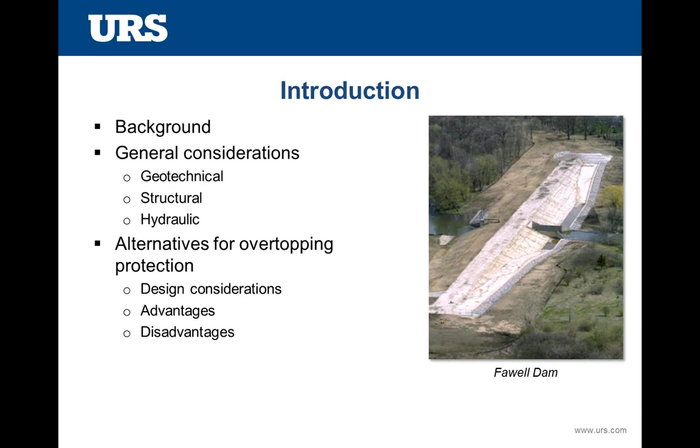I'll also give an overview of how selection of an alternative needs to consider not just discharge and velocity requirements for your spillway or overtopping protection, but also foundation conditions, structural considerations, and geotechnical factors. Then I'll end my portion of the presentation with a discussion of three situations or common alternatives I've used, and how we've incorporated design details to help mitigate the potential failure modes we'll be presenting here.

Just as an initial background, most of the interest in overtopping protection is a result of spillways on existing dams having an inadequate capacity. This inadequacy is driven generally by two things: the hydrologic conditions have changed in the methodologies used, or the hazard classification has changed due to downstream development.

There are many alternatives that can be used to increase or change spillway capacity, from raising the dam, changing the abutment or spillway configuration, or overtopping protection.

One consideration when selecting overtopping protection is that it introduces a potential failure mode that can lead to the dam breaching by directing water over the embankment. If the overtopping protection fails, you expose the underlying embankment material to flows or erosive velocities that can potentially lead to breaching of the embankment.

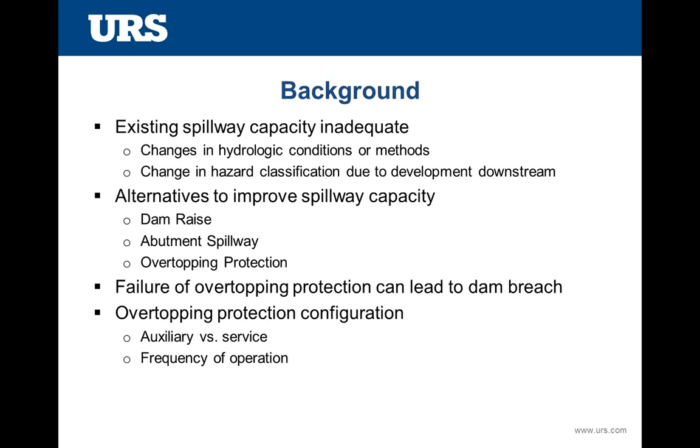The overtopping protection is also typically used for auxiliary purposes as opposed to a service spillway, and because of the potential initiation of an overtopping failure if the protection fails, the frequency of operation is also a consideration here.

Just wanted to provide a quick example of an overtopping protection failure. This was a small low-head dam, about 20 feet in height, that was protected by a conventional concrete overlay. There was no reinforcement or water stop in the joints.

Approximately one year before this photo was taken, there was an inspection of the dam where a one-inch crack longitudinally was observed near the crest of the dam.

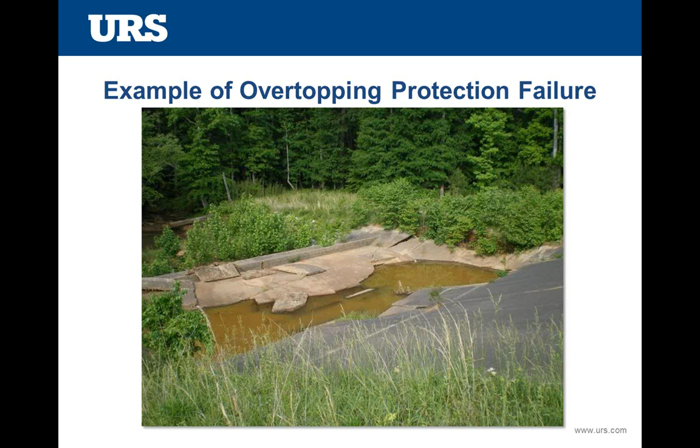The subsequent spring, there was a rainfall event that allowed the spillway to operate, with about 3 or 4 inches of flow going through. As you can see in this photo, the lower slabs of the chute as they enter the stilling basin have been displaced as a result of hydraulic jacking or uplift from water getting in behind the protection, going down to the toe, and then lifting out the slabs.

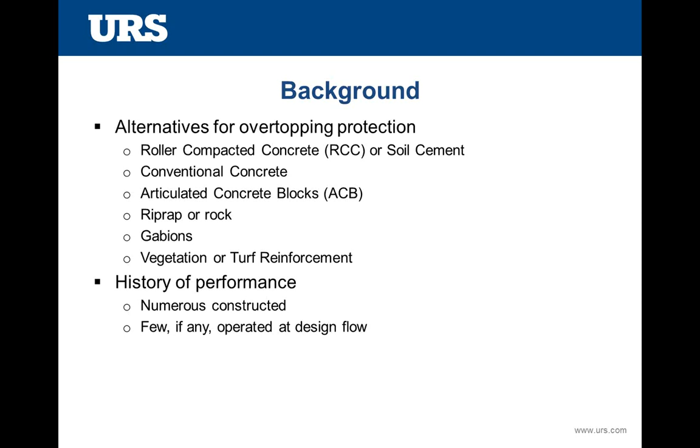Something else to be noted is the history of performance. While numerous dams have had overtopping protection constructed on them, few, if any, have actually operated clear up to the design flows, so the overall long-term performance is still something in consideration.

From general design considerations, the two potential failure modes of biggest concern are hydraulic jacking or uplift due to seepage or pore pressures developing underneath the overtopping protection, and water that passes through the protection and saturates the foundation materials, potentially causing piping around or adjacent to the structure, leading to structural failure of the overtopping protection.

Generally, from the frequency of operation standpoint, it's preferred if they operate less frequently than the 500-year flood. The PCA, Portland Cement Association, has recommended in the RCC Concrete Overtopping Protection Manual that they not drop below 100-year frequencies for these structures.

Something to consider too is once you start directing water over the embankment, there's a potential to increase or change the phreatic surface, and this can either impact embankment stability or again lead back to the potential for uplift or hydraulic jacking of the structural material.

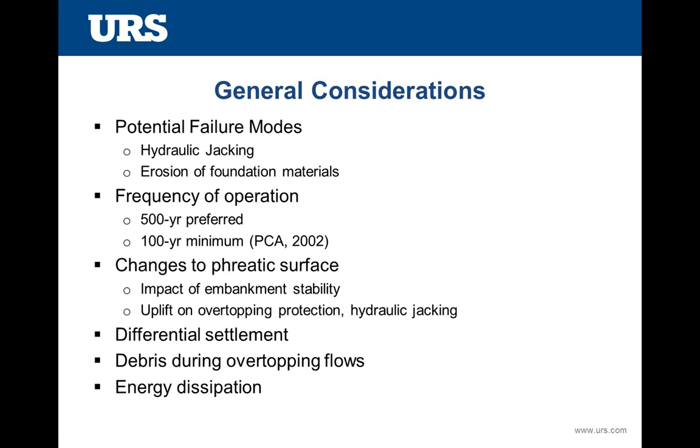And lastly is just general energy dissipation at the toe of the dam or at the end of the overtopping protection structure, making sure it's adequate so you don't lead into head cutting and undermining of the structure.

So some other general considerations about overtopping protection. By covering up the downstream face of the dam, it really limits observation of the embankment performance, so monitoring and long-term performance issues are more difficult to discern. The other thing is, as the dam or embankment is overtopped, there is a need for the water to converge back to the toe, and so we need to protect the abutment contacts with the embankment.

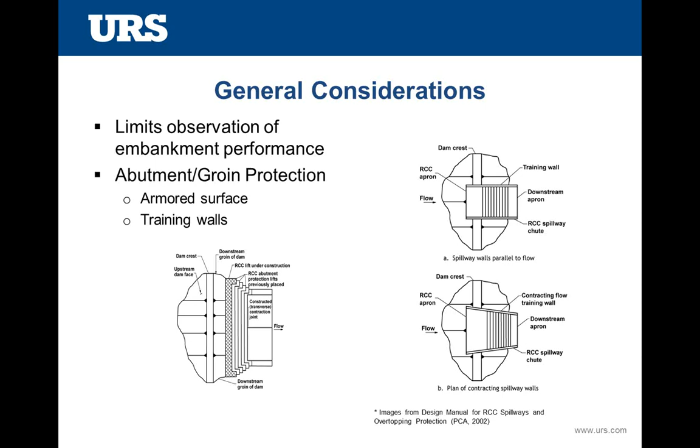Generally there's two options. You can extend the protection, as shown in the lower left picture, down along the embankment contact, and this would work for both articulated concrete blocks - this just happens to be an example of an RCC protection. Alternatively, on the right-hand side is more of a conventional training wall approach, whether they are parallel straight walls or a converging chute concept. Those are other options for keeping the flow off of the groin and protecting the embankment.

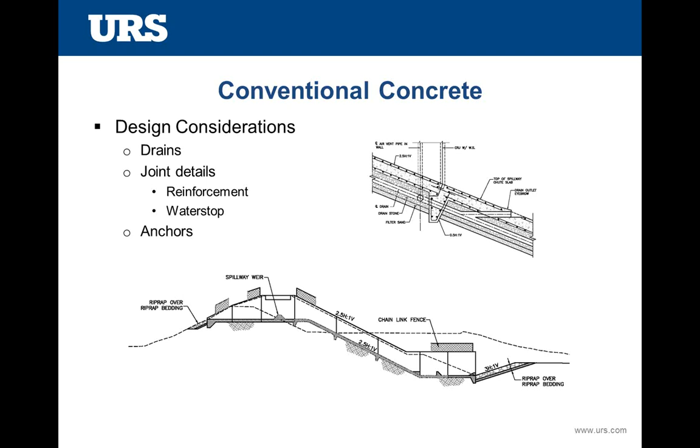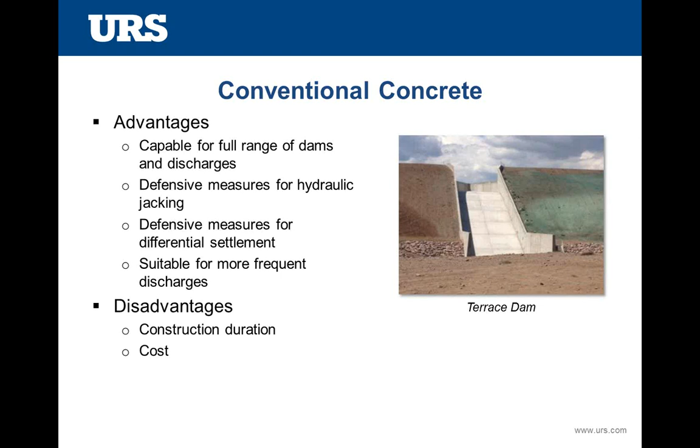So some of the advantages of conventional concrete are that it's really capable for a full range of discharges, heights of dams, and velocities. You can incorporate defensive measures to protect against failure modes. It can also handle some differential settlement, and it's also suitable for more frequent discharges because of those additional protections. However, some of the major disadvantages are construction duration - just the time to form and pour, the wait times between adjacent sections, and the overall cost. Depending on the actual configuration as it passes through the embankment, you can actually expose the dam to more risk during construction if the section of the embankment needs to be lowered for construction activities.

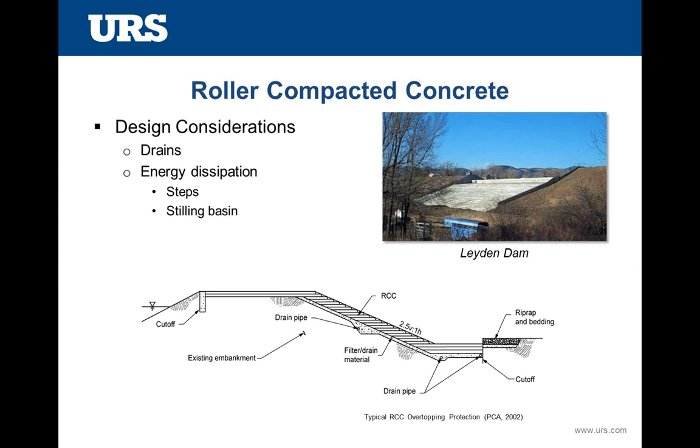As far as the advantages, RCC is suitable for higher discharges, maybe not quite as high as conventional concrete, but relatively high. Construction duration-wise, it can be put together pretty quickly, and we can also incorporate energy dissipation either through steps in the chute or into the stilling basin itself for an integral single product. The disadvantages are you really lack the defensive measures to mitigate differential settlement, water stop type material, and sometimes the availability of materials or equipment can be disadvantaged at certain sites and locations in the country.

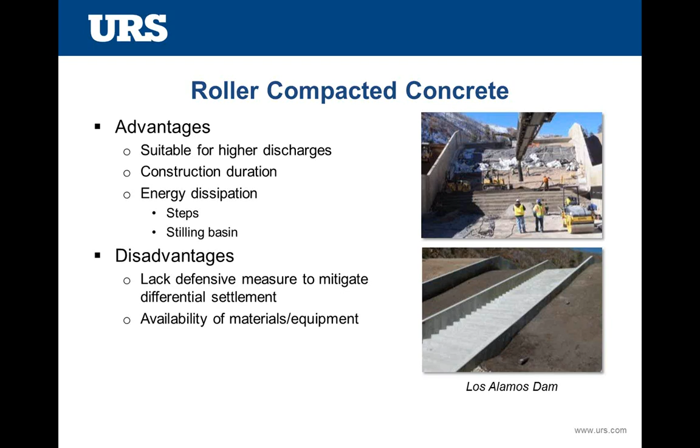From the articulated concrete blocks, we're starting to see some of the similar themes entering here. We want to have a drainage layer to minimize the potential for uplift pressures to develop. There are velocity limitations for the blocks in comparison to a conventional concrete chute. The other area of concern is flow convergence - if you want to wrap it around the abutments and down those groins, those concentrations of flow and complex hydraulic conditions need to be considered in the design of the blocks.

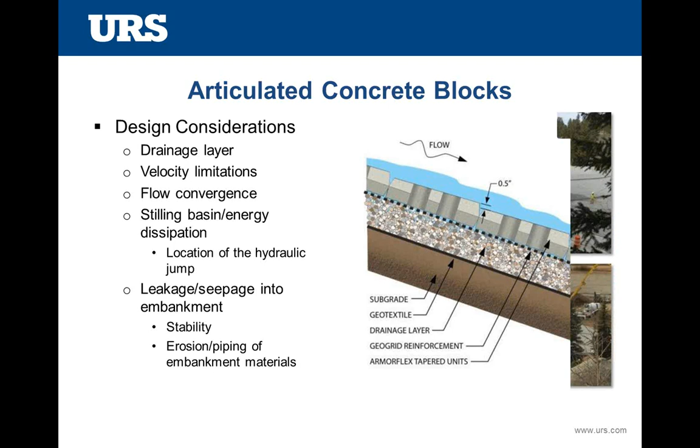And then last but not least is the seepage of water through the blocks and the gravel layer into the foundation or embankment material, which needs to be considered both in the stability of the embankment as well as the potential for piping of the material.

From the articulated concrete block, some of the advantages are that it's a flexible system with the potential to move. Construction duration can be assembled very quickly, so if you have to lower an embankment to do construction, there's a smaller window for being at risk. And it's a customizable geometry to fit site-specific conditions.

Some of the disadvantages compared to the other two systems we've talked about: lower design discharges or velocities, and the potential for extended use can elevate embankment pore pressures.

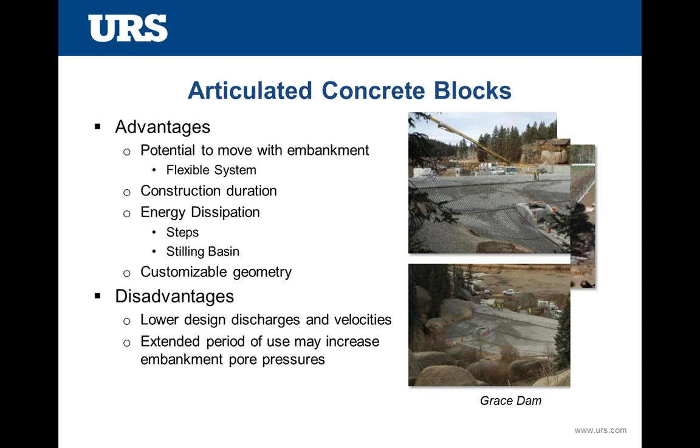Overall, we've just talked about a few of the failure modes you should be aware of when selecting overtopping protection, and those failure modes and the selection of alternatives need to be consistent with the geotechnical and hydraulic suitability for your project.

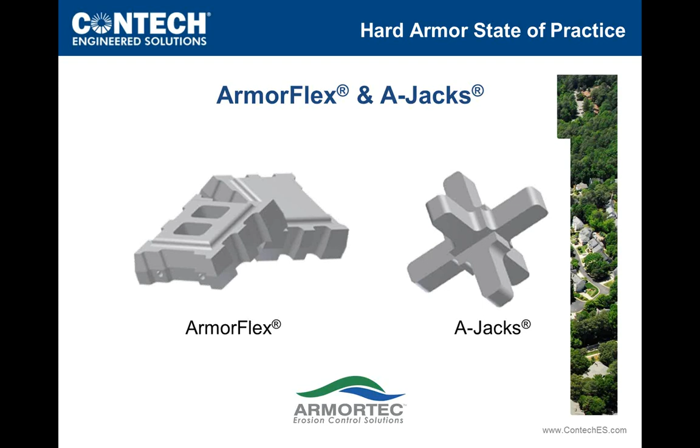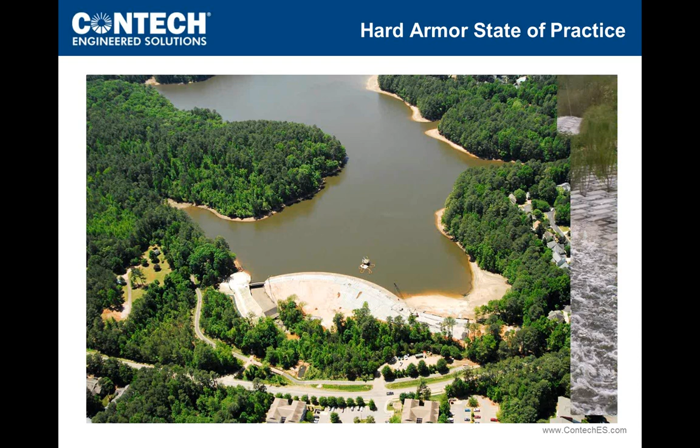Hard armor products are often utilized on sites where getting erosion control right the first time can determine the overall success of a project. An example is shown here, in Raleigh, North Carolina, where ArmorFlex ACBs were used to mitigate overtopping, or provide overtopping protection, on the site. Supporting the designers in the pre-design phases, as well as the contractor after construction began, really made the difference with this project, allowing for a compressed and very efficient timeline.

What you're looking at here are project sites which experience a regular assortment of hydraulic discharges, from the 2-year to the 500-year event. These are prime candidates for where hard armor can really make sense. The use of ArmorFlex ACB shown here maximizes flow conveyance due to the system's relatively low Manning's N coefficient, while also providing the hydraulic stability and robustness required from a permanent erosion control system.

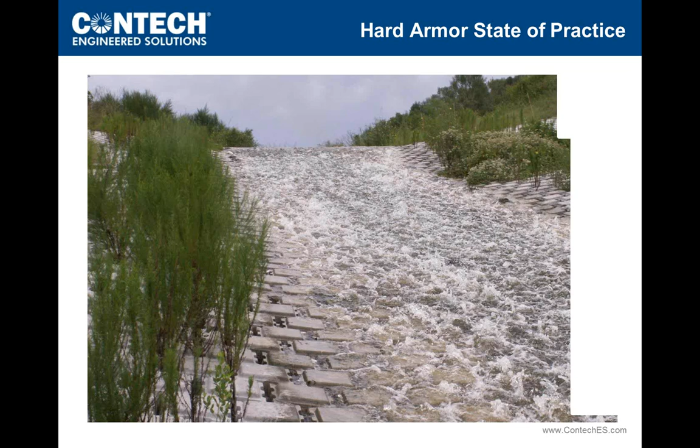I'll continue on with the hard armor state of practice section of the webinar, focusing on ArmorFlex articulated revetment systems. Topics will include current design standards, testing certifications, and ongoing improvements to serve the industry.

For articulating concrete blocks, the current state of practice must begin with the system's compliance to ASTM International standards. Very important here: setting up and administering the overtopping test is the first step to achieve compliance with the ASTM standard.

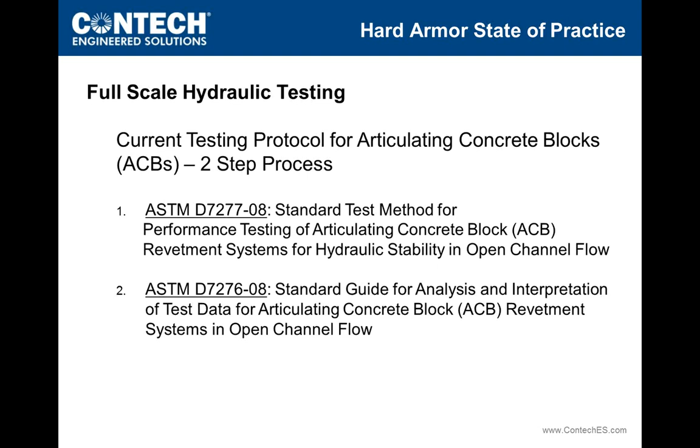Regarding that overtopping test and setup, you look to ASTM D7277 to satisfy that need. This standard discusses preparation, installation, instrumentation, and other setup considerations required to perform a successful and informative test. After testing is completed, ASTM D7276 was developed to provide strict guidelines for the analysis and interpretation of the full-scale test results. From these results, unique ACB capabilities can be determined and applied to the factor of safety method. It is the responsibility of the manufacturers who offer ACB armoring solutions to employ both of these very important design standards.

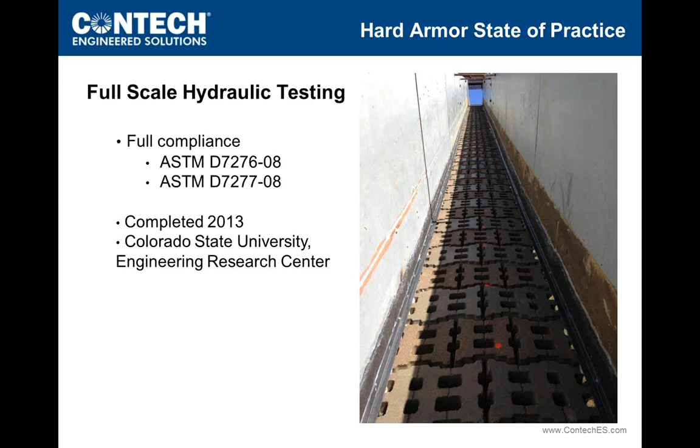Contech is in full ASTM compliance across all its ArmorFlex ACB offerings. Our recently completed testing programs have provided us, and more importantly the customers out there, with the most recent performance data and improved construction techniques of any ACB system being applied today. ACB systems continue to evolve and improve through strenuous testing and by drawing from installed projects across the country that have satisfied design conditions. Throughout North America, Contech has supplied more ACB projects that have met or exceeded design conditions than any other manufacturer.

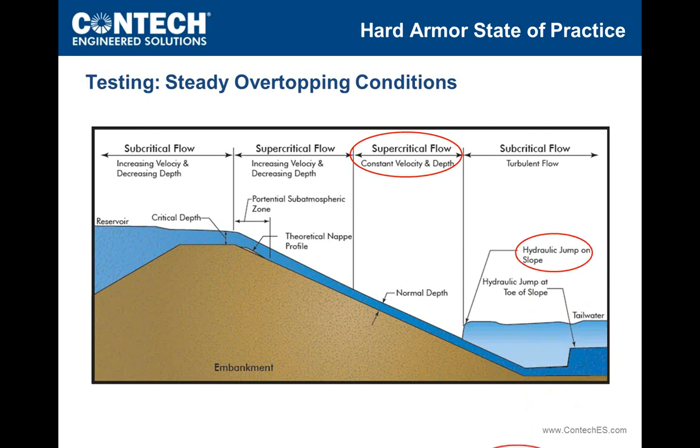But as designers, where does one look to find proven methods to determine factor of safety against hydraulic conditions? Where can one find real-life design examples to follow? In the case of ACB systems, the National Concrete Masonry Association Design Manual is accepted as the most current and all-encompassing design tool. Industry standards for hydraulic design have been consolidated in this 2009 second edition. Most importantly, with this manual, step-by-step design examples can be followed with straightforward explanations of variables and, almost more importantly, design assumptions. In addition to design guidance for ACB systems, this manual also includes filter design assistance, coverage area recommendations, and common construction details. It is a crucial resource.

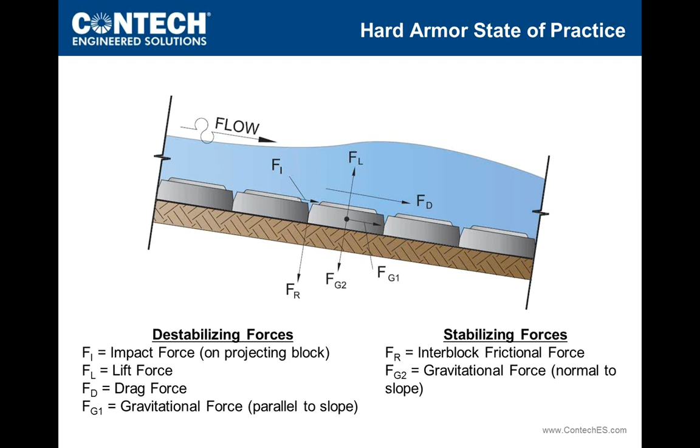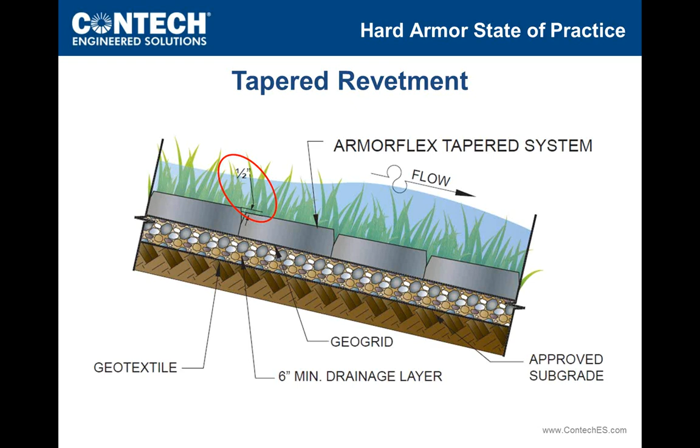To function properly, the blocks need to be placed on a free-flowing stone drainage layer. This is to relieve any hydrostatic pressure that may build up underneath the system.

The design method for hydraulic stability is constantly being refined and improved. We find out things in the field, and we find out things from researchers. In 2011, NCMA released an addendum to the 2009 design manual titled TEK 11-12A, ACB revetment design, factor of safety method. This most recent addendum considers the uncertainty of flow direction for a proposed ACB application, which adds another possible layer of conservatism when a designer is faced with questionable design inputs.

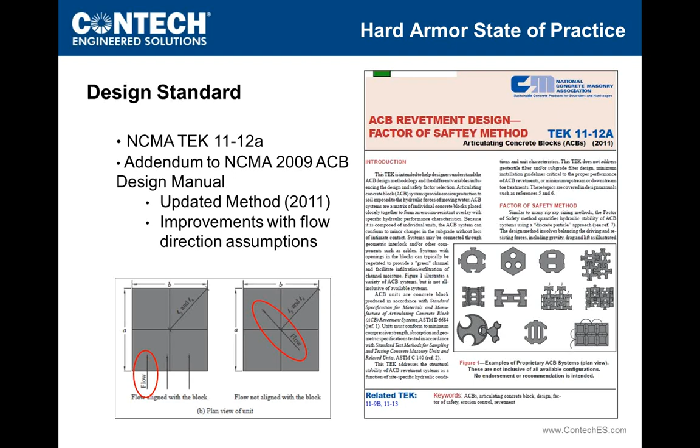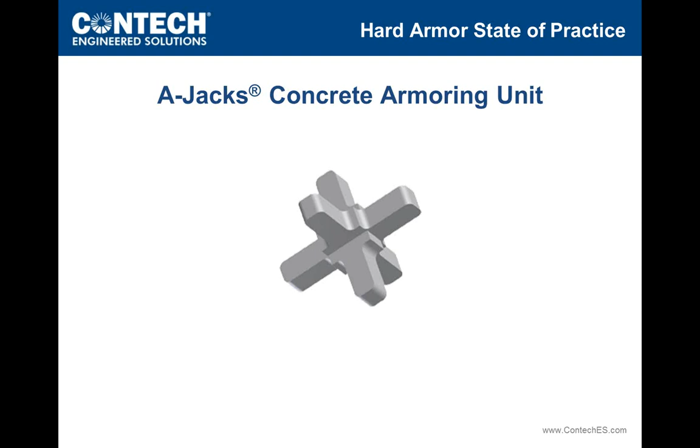I will now continue this section with a discussion of the A-Jacks concrete armoring unit. A-Jacks concrete armoring units are another hard armor solution primarily focused on mitigating bridge scour and promoting energy dissipation. The current state of practice for this product is strongly linked to A-Jacks' versatile installation methods and options. Varying in sizes from 24 inches to 120 inches, severe hydraulics can be addressed with this robust armoring system while maintaining straightforward and efficient construction practices.

Like the ACB free body shown before, hydraulic forces acting on the A-Jacks layer are trying to lift and overturn the system. They're trying to overpower the interconnected interlocks, both lateral and vertical. Basically, the unit is locked in vertically and horizontally with its brothers and sisters around it. And what this does is create a continuum of armoring, meaning a system with significant capability to resist uplift and overturning moments. So, a very robust system.

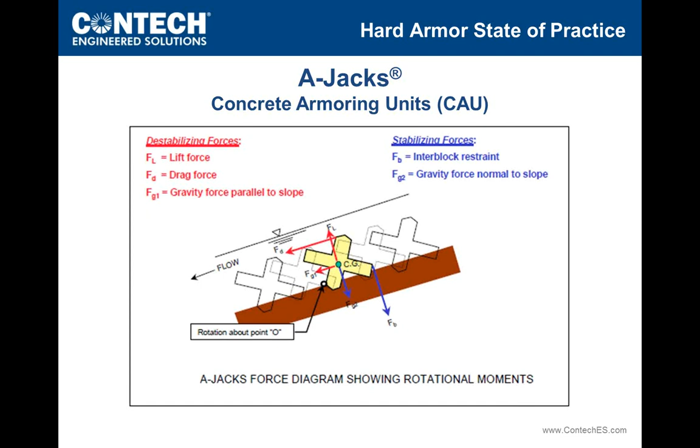A-Jacks units have been included in the most recent edition of HEC 23, issued by the Federal Highway Administration, which provides accepted scour mitigation systems and products, incorporated with other design aids such as HEC 20 to assess stream stability and HEC 18 to analyze scour. Selecting the proven A-Jacks armoring system is the final task to successfully mitigate risk of scour to structures.

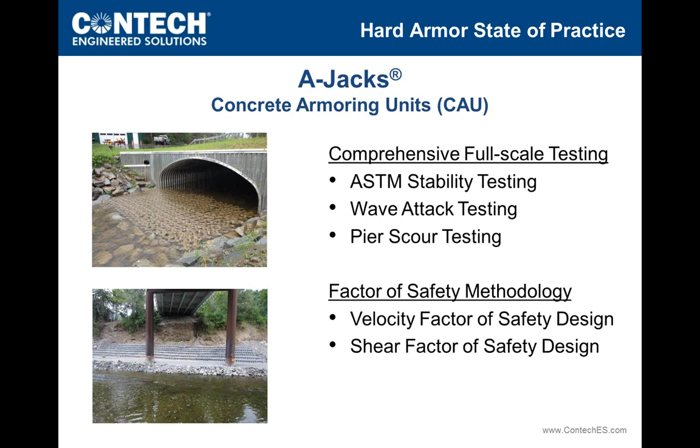Concrete armoring units, like their ACB hard armor counterparts, should be subjected to full-scale hydraulic testing to determine performance thresholds. How much water can they take is the question. Contech has made sure A-Jacks units have not only been tested for channelized flow conditions, but, like the ArmorFlex ACB system, have been successfully tested in wave attack scenarios as well.

I would like to now take a few minutes to discuss spillway design, getting a little specific here. Primary and auxiliary spillways are a common application for hard armor. Contech would like to share characteristics of its hard armor products which can assist with designing these types of structures, beginning with the design event or discharge of the spillway.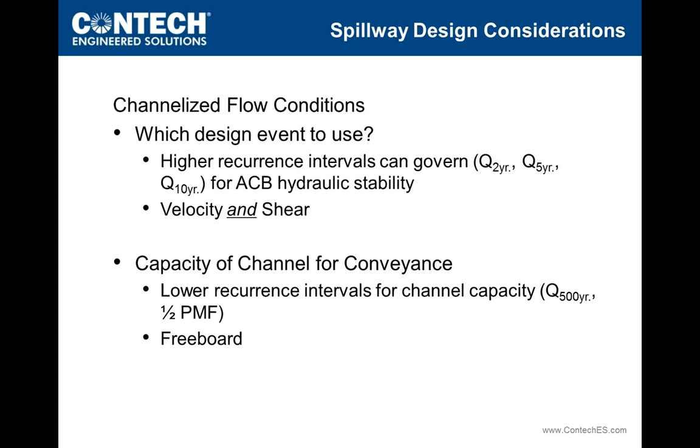It is common for higher recurring events to govern the design of the armoring system being considered. Specifically, higher velocities associated with these events heavily influence the determination of the adequate revetment being chosen.

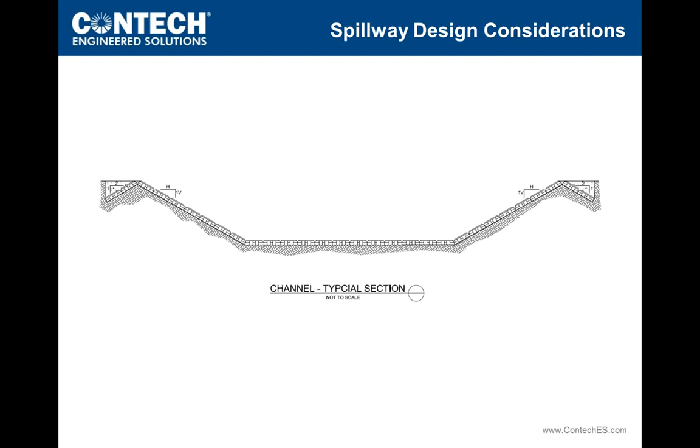Looking again at the cross-section, the blue flow area represents lower recurring flows, which still must be conveyed through the proposed spillway, often due to stormwater or drainage requirements. It is plain to see that this event determines the geometry and ultimately the cost of the structure, but not necessarily the failure mode of the revetment.

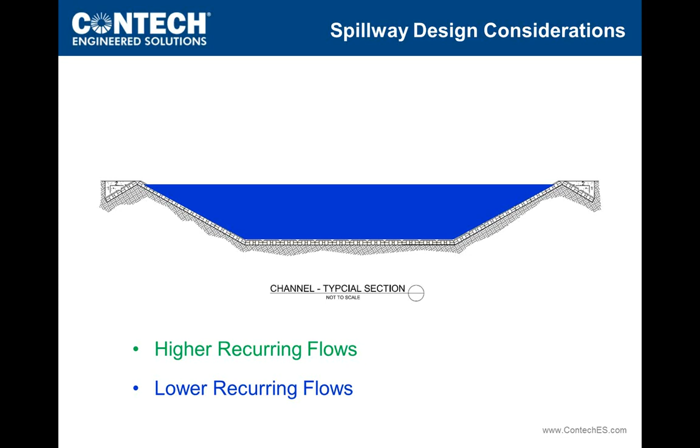An alternate factor of safety associated with these lower recurring events can be considered for spillway design. This effectively assures the larger design flow will be passed while balancing everyday flow conditions and requirements of the spillway. Factor of safety for conveyance is often set at the industry standard of 1.5, and it should be noted that the relatively low Manning's coefficient of ArmorFlex can often enhance conveyance and, in most cases, reduce excavation required.

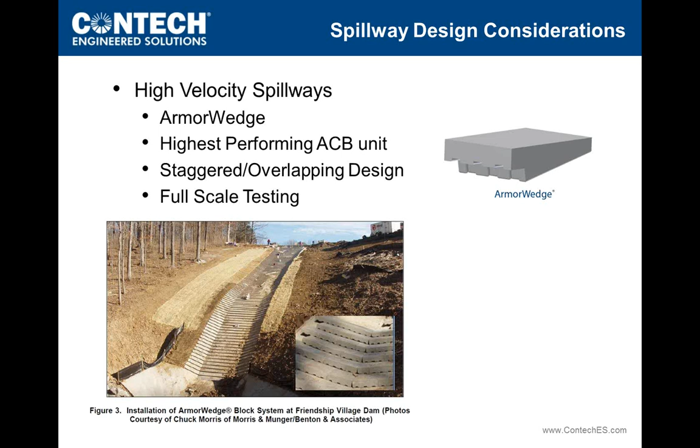As Greg alluded to earlier, traditional ACB systems can be limited, specifically by flow regimes with high velocity. In these cases, Contech offers the ArmorWedge unit. Tested to ASTM compliance in full-scale conditions and subjected to standard factor of safety analysis, ArmorWedge provides a unique solution to the most severe spillway conditions and can often be used in lieu of concrete or even roller compacted concrete.

That concludes my section of the webinar. Right now, we will transition into a poll question, and I will turn it over to Lisa.

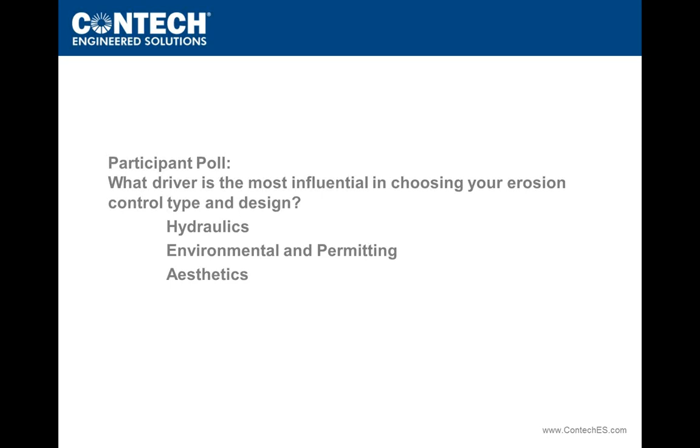Clayton, I'm going to turn it over to you, and I know how you feel about the aesthetics. I'm surprised it's that low, too. Yeah, I think this morning we saw 4% were choosing aesthetics, and by the time you take a look at the ability to have a green look to an underlying hard armor system, in some instances, that it's just surprising.

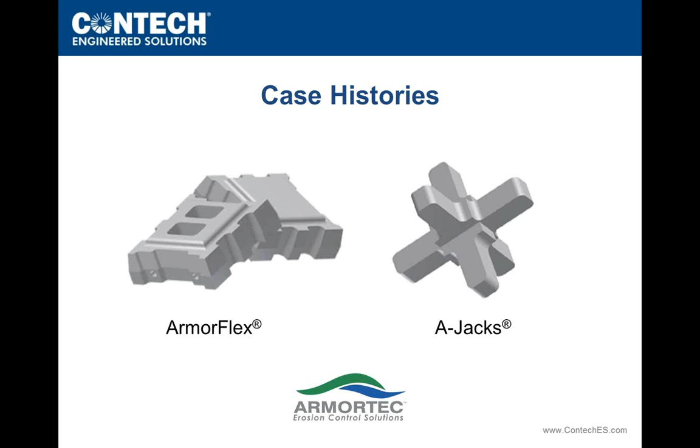However, at the end of the day, we're here to protect our stream channels and structures with hard armor solutions. So thank you, Lisa, and thanks to Barry, Jeff, and Greg as well. My name is Clayton Fawcett. I'm the area manager for the Armortec business in the western half of the U.S. I've been fortunate enough to have been in this industry since 2004, and I'm happy to be here today. I'm glad we get the chance to share some of our successes with such a large and varied audience. I'll be highlighting some of our challenging and interesting projects in this next section.

We were contacted in 2010 by the NRCS, who is tasked with managing floodwaters through their structures in North Dakota. The Absaraka Dam spillway had experienced erosion in the past and was in fact flowing again due to spring flooding in the area.

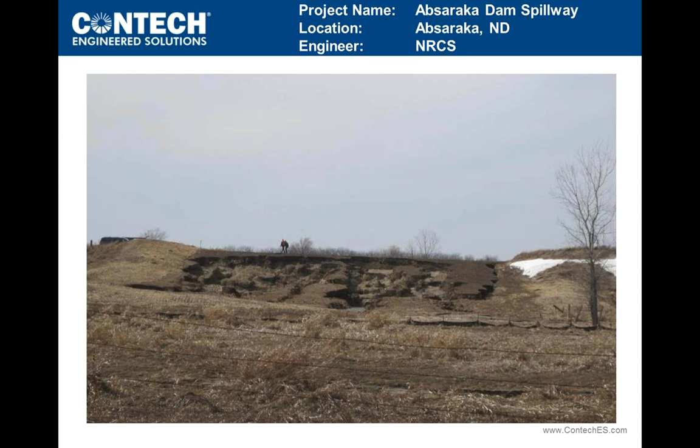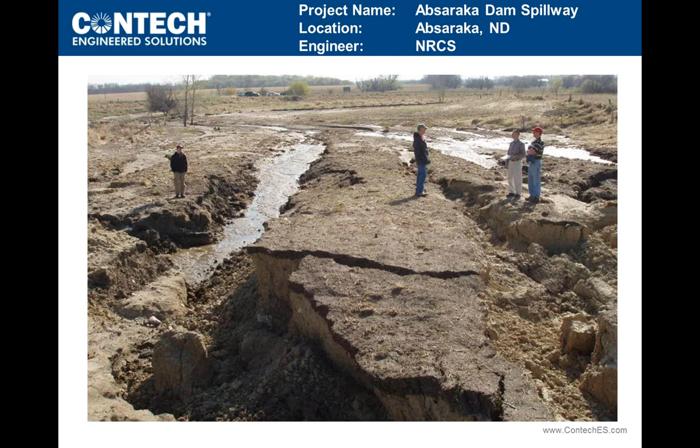Following the overtopping event, it was evident that there was significant erosion on the spillway. Upon closer inspection, severe head cutting and mobilization of subgrade soils had taken place. Erosion of the spillway created a potentially dangerous condition for the downstream residents. In fact, the National Guard was mobilized to stand watch at the dam and sound the alarm in case of rupture.

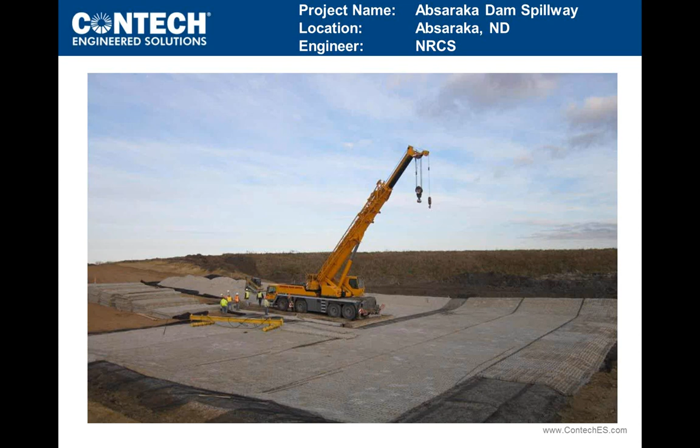Contech worked with the NRCS Design Office in Des Moines, Iowa, as well as the North Dakota NRCS staff. Ultimately, installation of an ArmorFlex tapered block system was selected by the NRCS staff as a long-term corrective measure to counteract the erosive forces that were occurring in the spillway.

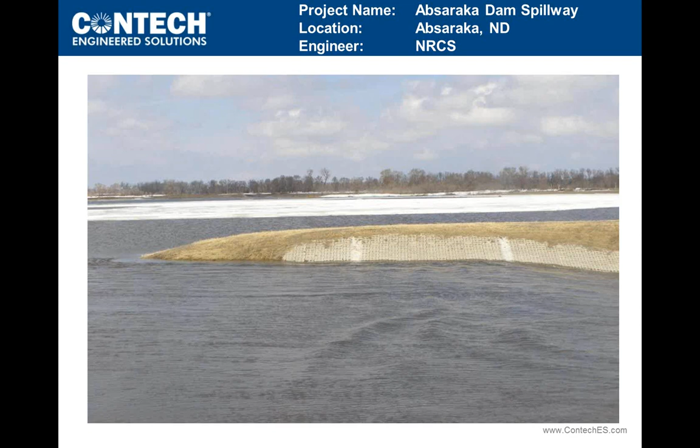In the spring of 2011, the spillway was once again put to the test. Heavy snows throughout the winter and warm spring rains released a large volume of water in a short amount of time in the watershed. As evident in this photo, a significant amount of water passed over the armored spillway.

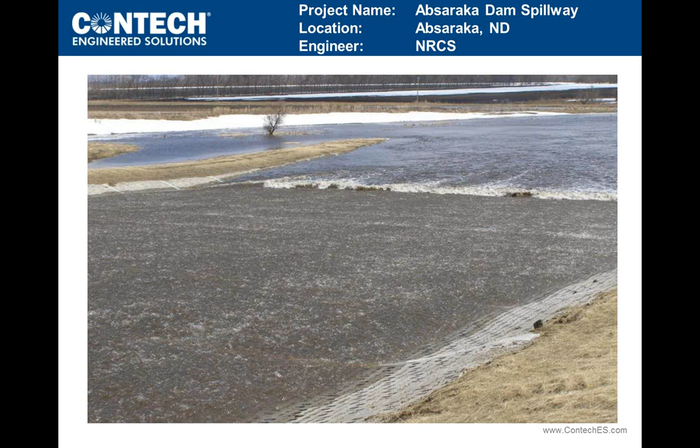A hydraulic jump was expected due to the downstream subcritical control provided by a nearby road embankment. The jump formed on the armored section of the spillway, although it's not visible because it's submerged. The ArmorFlex apron extends to the end of the guideway berm, which juts out diagonally across the top center of the photo.

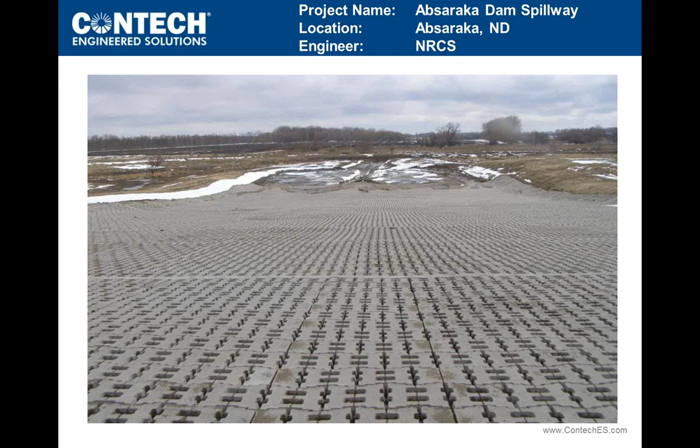Following several days of overtopping flows, the ArmorFlex system showed no signs of soil migration or soil loss beneath it. The system performed as designed. And I just wanted to say a big thank you to the NRCS for passing these photos along to us.

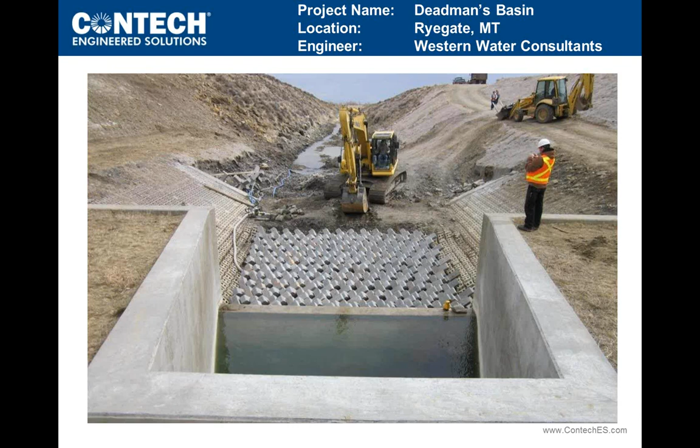Next project we wanted to take a look at is near Ryegate, Montana, and that's the Deadman's Basin impoundment. This reservoir is managed by the Musselshell Irrigation District for irrigation purposes. In a cooperative project with the dam owner, the Montana Department of Natural Resources, the outlet conduit was rehabilitated and updated. Part of the protective measures employed, ArmorFlex and Ajax were placed directly downstream of the outlet works.

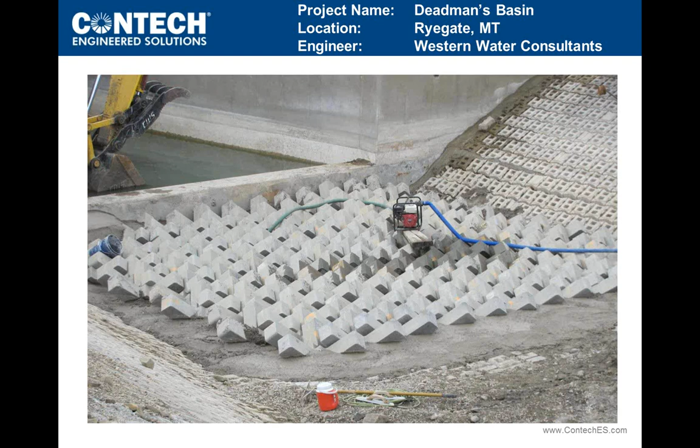48-inch Ajax were installed directly downstream of the outlet, with ArmorFlex on the side slopes and in the downstream section. One note is the interaction of the adjacent protective measures must be thoroughly evaluated. In this photo, the concrete grout or hydraulic connection between the Ajax and the ArmorFlex is shown. This is a key detail to maintain continuous protection through this turbulent flow zone.

The functioning outlet is subject to severe and varying degrees of turbulent, unsteady flows, depending upon the discharge and tailwater conditions. Musselshell Irrigation District was gracious enough to work with Contech and the designer, Western Water Consultants, to run this installation through the paces. Flows from 50 cubic feet per second through 345 cubic feet per second were evaluated.

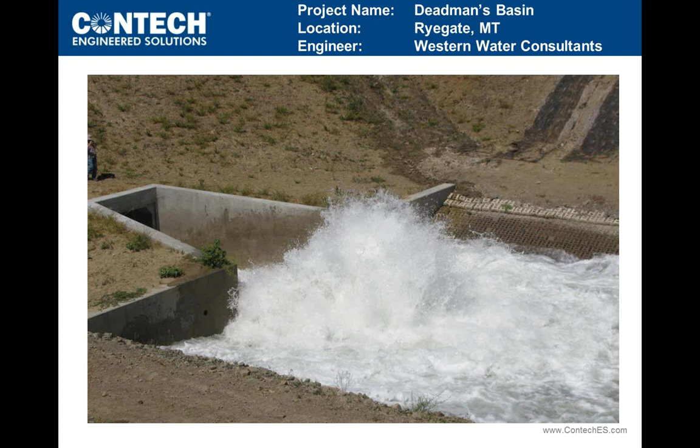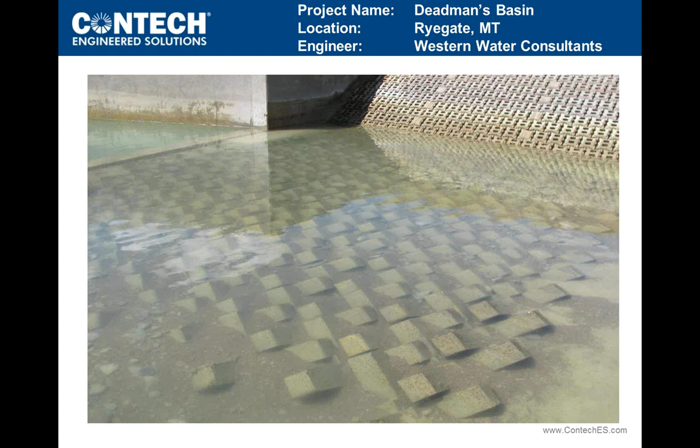In this photo, we're showing a hydraulic jump at 345 cubic feet per second directly on top of the 48-inch Ajax. Following the run-up testing, flows were stopped so the installation could be evaluated. The roughness of the Ajax caused sedimentary infill and deposition within the matrix of the previously unfilled Ajax.

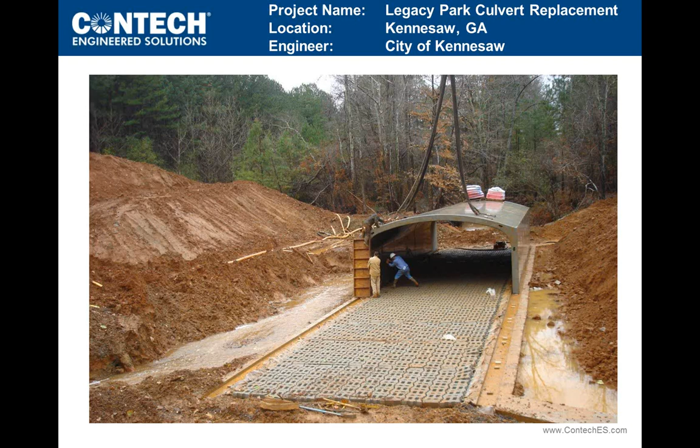Next project is a coordinated systems-based approach. Contech was able to work with the city of Kennesaw, Georgia to assist in the solution development of a culvert in need of replacement, taking advantage of the open waterway area of the Contech Conspan bridge structure, and additionally open cell ArmorFlex to protect the invert. Speed of construction and local on-site assistance were two of the benefits to the owner on this project.

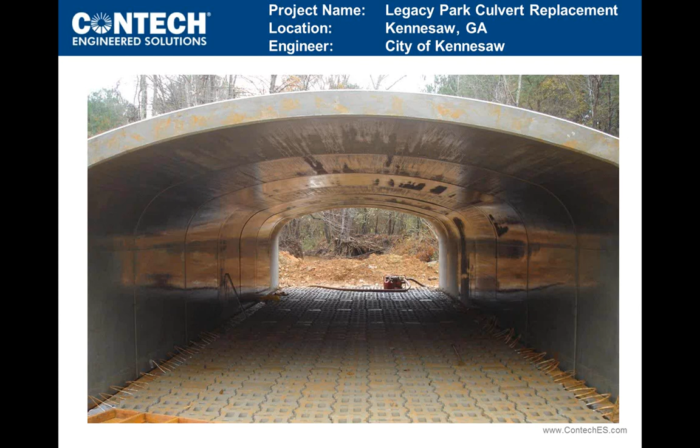Interaction between all elements once again becomes a key component and functionality of any system. Prior to completion, the exposed cable loops on the ArmorFlex mattress, which are shown in the right and left extremes of this photo, were encapsulated in a hydraulic connection, or a grout closure pour, effectively sealing it to the strip footing on which the Conspan units were set.

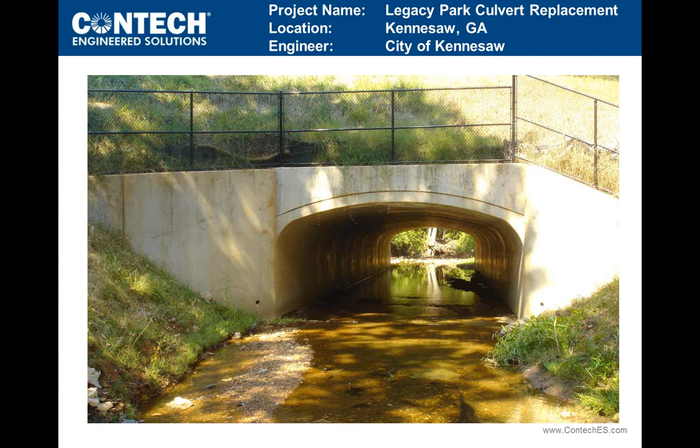Finished product. Note the open area provided by the Conspan structure, and additionally how the live bed sediment transport is uninterrupted through this system.

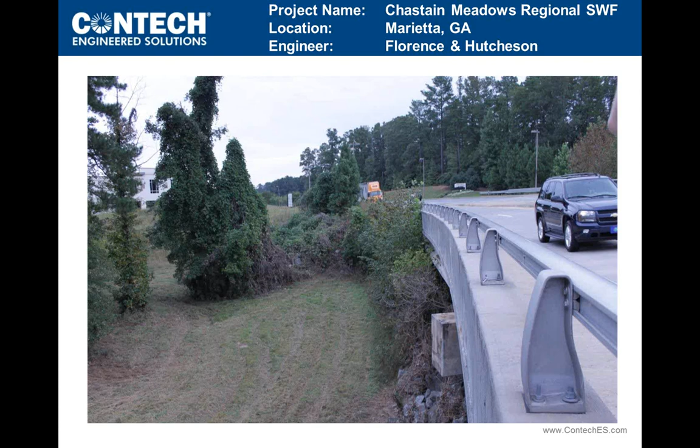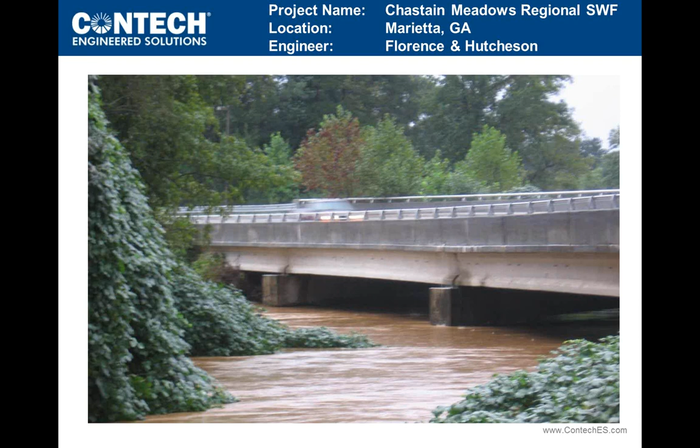Chastain Meadows Regional Stormwater Facility in Marietta, Georgia provided a unique set of challenges for the designer Florence and Hutcheson. This photo shows an area adjacent to a nearby bridge in everyday standard operating conditions. And this photo shows the same area in a flood condition. Very large volumes of water flow in this watershed.

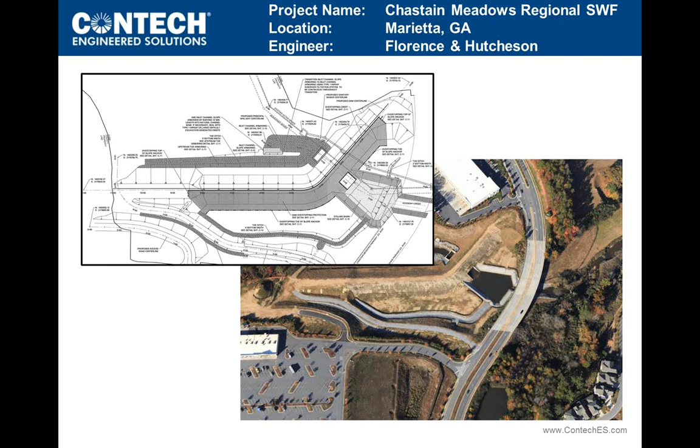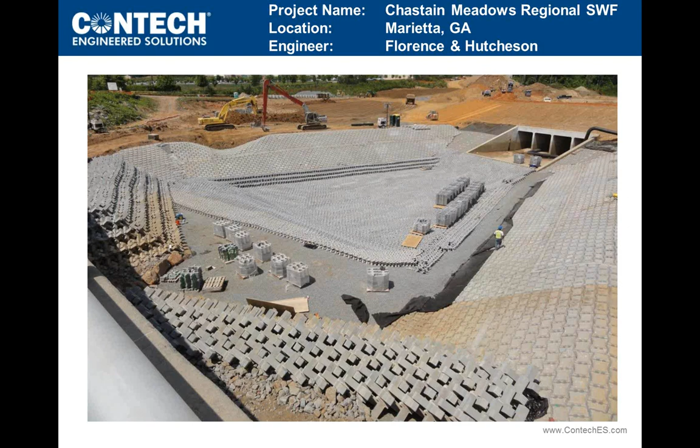Project owner Cobb County, Georgia understood the need for a regional stormwater facility to mitigate some of the downstream flooding. Plans were finalized and construction was substantially completed in 2011. Both closed cell and tapered ArmorFlex was utilized in this project, as well as 24-inch and 48-inch A-Jacks. The embankment was protected from overtopping flows, and the downstream basin was also protected from erosive forces.

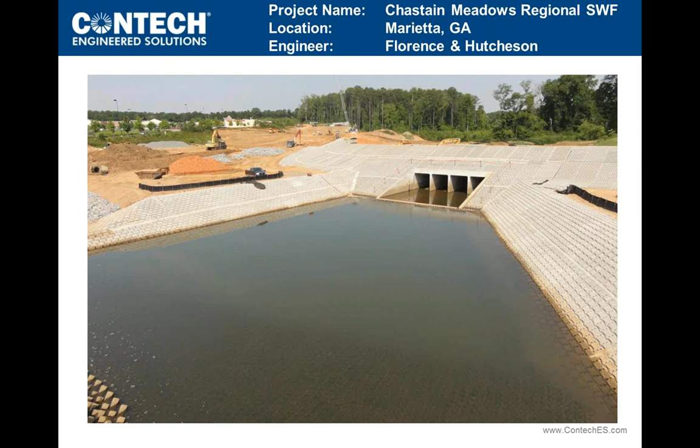Contech personnel supported this project by attending on-site construction meetings and were continuously available for questions from the contractor and engineers as they came up. On this project, that meant 24-hour support. When our customers are working, we're working to support them.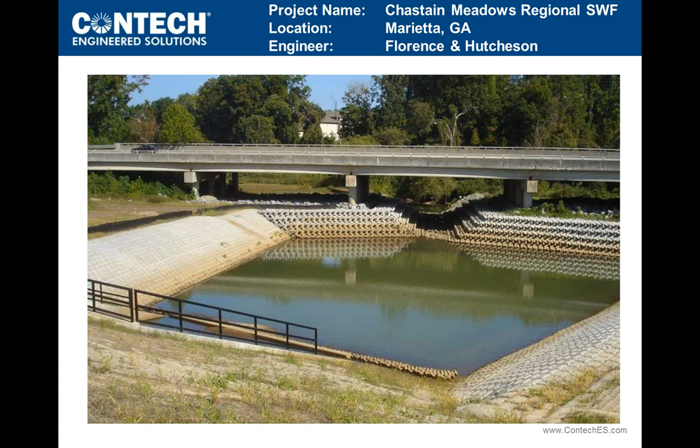Completion of this project created a stormwater basin capable of handling significant flows. Additionally, measures were provided to protect the downstream bridge and supporting piers, which can be seen in the far end of the picture, along with the 48-inch A-Jacks on the slopes near the bridge.

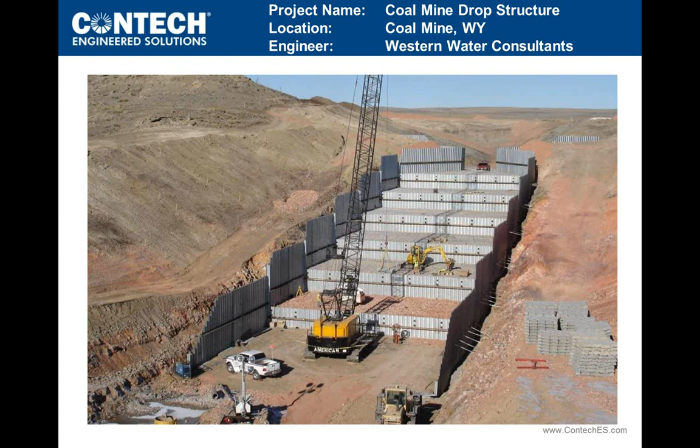Extraction of low sulfur coal in Wyoming coal mines found Contech working with Western Water Consultants once again to provide erosion protection. This structure was completed as a temporary diversion around a mining cell, effectively and safely conveying stormwater through roughly 42 feet of difference in channel bed elevation, as we'll see in the next photo.

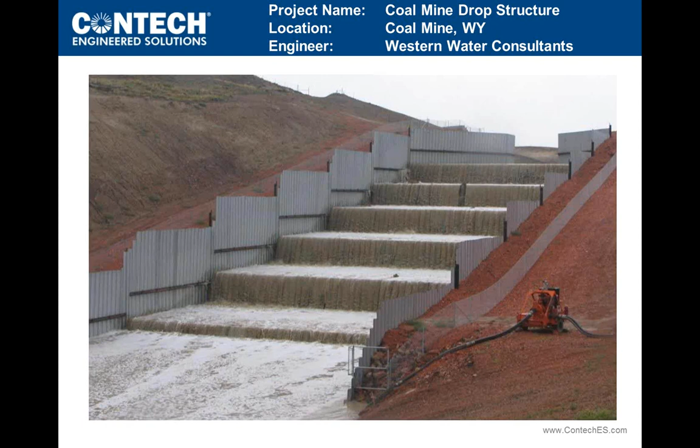Large drainage basins produce a lot of water. Here we can see an example of the result of a western storm which produced significant flow over the structure, and it additionally performed well over its life.

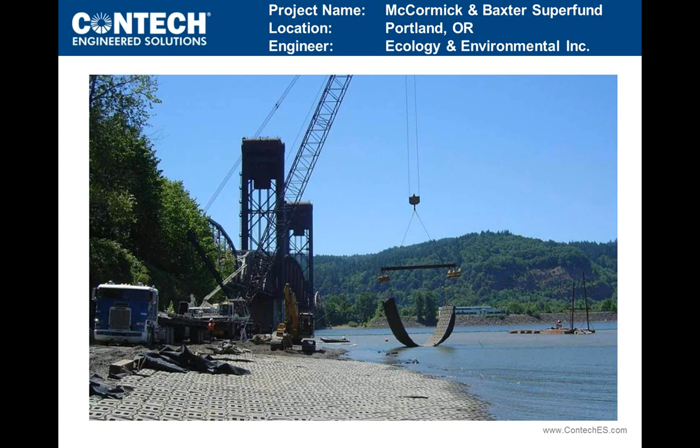The McCormick and Baxter Superfund site in Portland, Oregon presented a unique opportunity for the employment of Contech's ArmorFlex system. ArmorFlex was selected for the protection of a sediment cap at this site, which was the third and final phase of containment of dense non-aqueous phase liquids, or DNAPLs. Years of operation of the McCormick and Baxter creosote facility on the banks of the Willamette River had taken their toll, and prior to the cleanup of the property, creosote was actively leaking into the Willamette River.

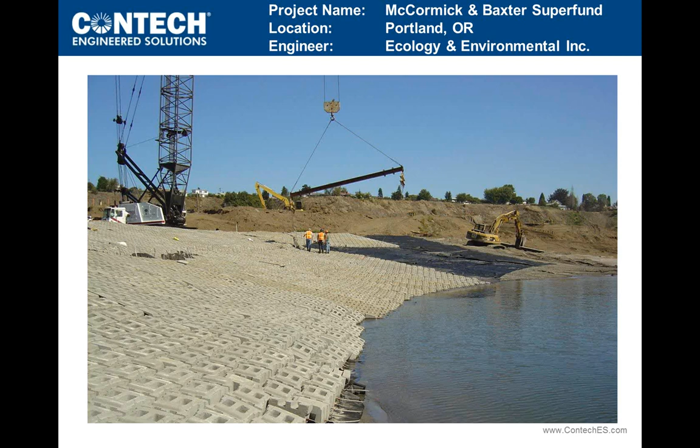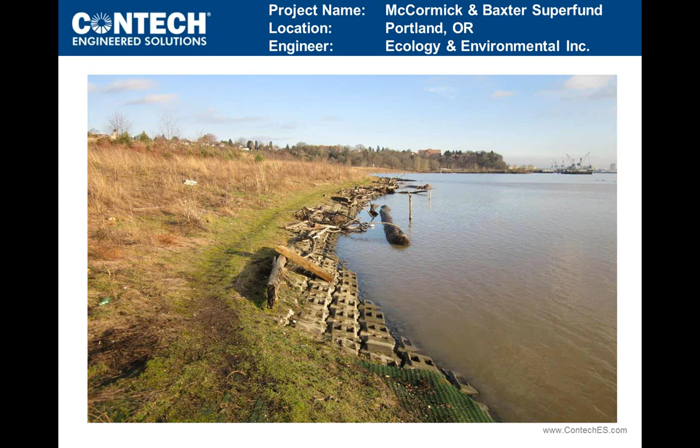Contech supported this project with almost continuous presence due to its complexity. After almost 10 years since the installation, natural vegetation has taken over the upland bank sections over the top of the ArmorFlex. Once again, the Port of Portland can be seen in the background.

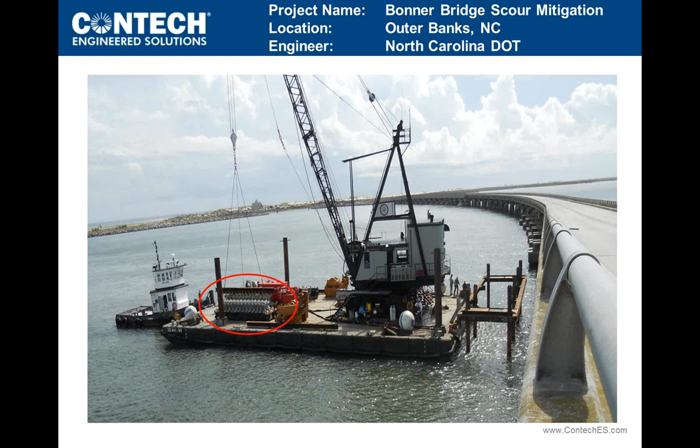Contech's 48-inch A-Jacks was a solution called for by the North Carolina DOT when dealing with scour critical bridge piers on the Bonner Bridge near the Outer Banks in eastern North Carolina. The contractor on this project had no other choice than to work from the water. Here, a barge-mounted crane prepares to lift a module of 48-inch A-Jacks, as highlighted by the red circle. The contractor then placed them on the seabed near the pier footing.

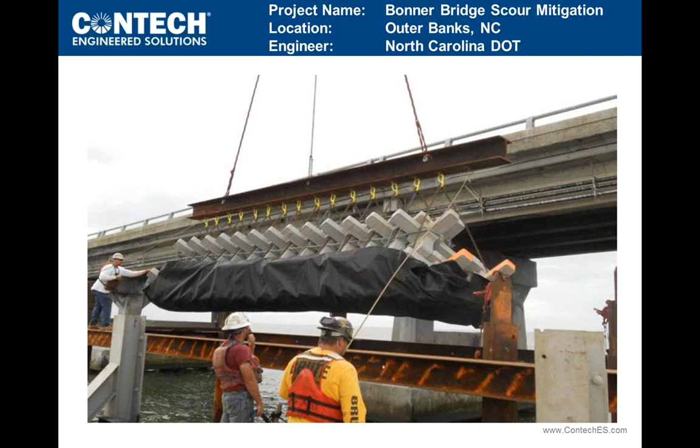Here's a closer look at the module of A-Jacks. The contractor had to rig their own spreader bar to put them in place, and divers were utilized to release the spreader bar from the module once in position.

That's our last project we're going to highlight today. Now we're going to go to one more poll question before wrapping up by explaining how Contech can support you with your designs.

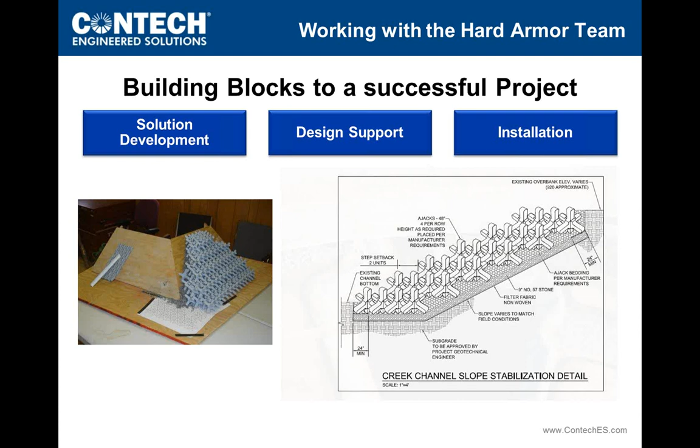Not only did we have to design a structure that could handle the hydraulics, we had to make sure it could be built in the field. As Clayton mentioned earlier, Contech provided on-site assistance, on call 24 hours a day during construction to support the successful installation of the ArmorFlex and A-Jacks.

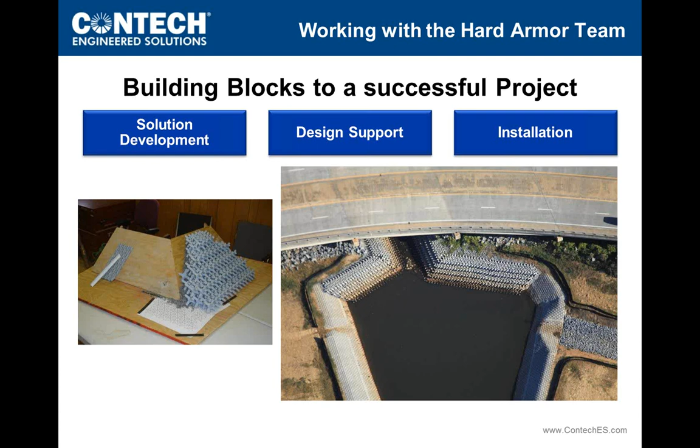At Contech, we're very proud of our hard armor product portfolio, and our team of experts are here to support you in your projects. We thank everybody for their time today, and hope that when you encounter needs for hard armoring, you engage Contech's support so we can assist you in taking advantage of these solutions, as many other designers have in the past. With that, I'll turn it back to Lisa to close out our session today.

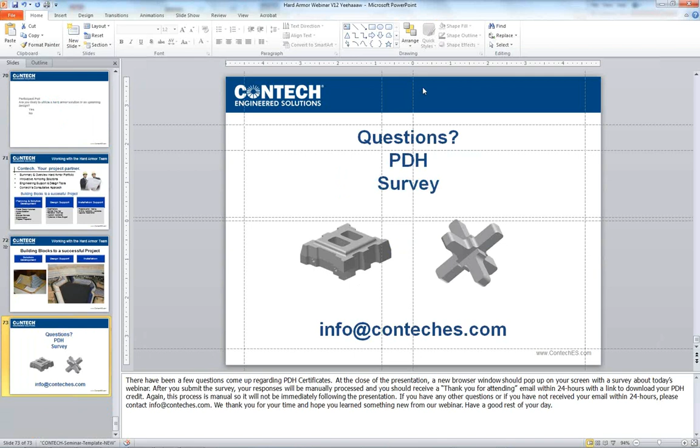If you're talking about a low water crossing, you're talking about articulated concrete block units that are installed over a channel that is oftentimes just wet, with a little flow through there. Vehicles can travel through there, but occasionally they do see a gully washer, as we like to say, and something like that happens. You have to have an overlay or a system that'll take those hydraulic forces.

So you have a balancing act between improving the subgrade to handle the wheel loads, and you can steer that right to classical road design, improving the subgrade to accept the wheel loads. You can incorporate geogrid to lessen your rock thickness to improve it. There's many different ways out there; we have a standard that we use. And so that's the first part.

The second part would be to look at the revetment, or in this case the ArmorFlex, and size that appropriately. Number one, it's behaving as an overlay, and number two, it's an overlay that has significant hydraulic capacity. So you need to look at the hydraulics in some form for those applications. So that's, I hope you found that helpful.